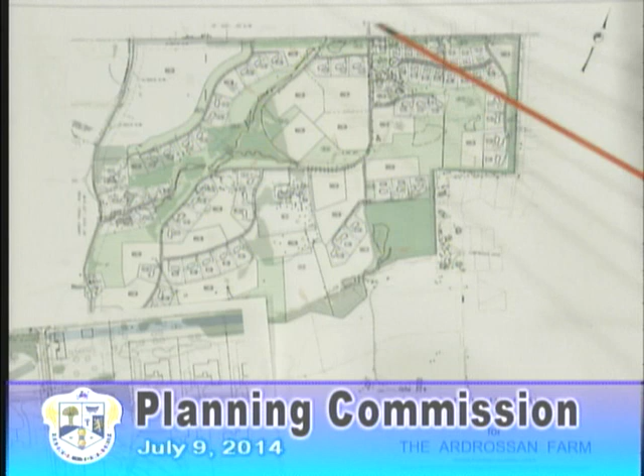And the stone wall there, you're not proposing widening that? Oh yes, there will have to be a widening of that stone wall at the opening, like there will be down here. And there'll have to be a reconstruction of a portion of the stone wall here because of sight distance, and a portion of the stone wall here. We're aware of that - restoration of those stone walls is part of the project.

Amy, can you, at least for my benefit, talk about the pros and cons of having 3 accesses, which are going to take what feels to me like maybe 90% of the traffic, versus 1? The pros and cons - of 3 versus 1. Are we better off with 1 or 3? Is it a big disadvantage to have 3 over 1, or is it an advantage?

The pros would be, as you're entering and exiting this site, the people that live in the development would have less delay because it's distributed at 3 different accesses depending on where they're coming in and going out. Actually, that's not true because these aren't connected. The cons would be to the motoring public on the roadway they're taking access to, because when you have multiple driveways, that introduces conflicts at each of those locations.

So are people going to need a left-hand turn lane, or slow down? You need to be aware that vehicles may be pulling in front of you or turning right or left, so there's more conflicts you need to be aware of versus on 1 road or 2. Or you could look at it as traffic calming. It goes both ways, and you could make an argument one way or the other on these things. That's why I deferred to PennDOT to see what they wanted to do on this. I understand the historical nature of the lot, and I understand the desire to keep that one-way entrance coming in.

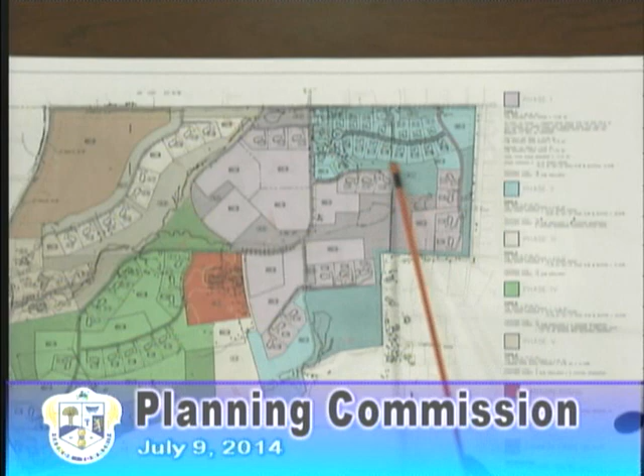All right, so which is road A? Road A is the cul-de-sac road in Phase 2. It is the road that parallels Newtown Road, the one we had a discussion on a few minutes ago. And that's the one that's 1,217 feet long.

So it's not the one that comes into the site, coming down on the page - it's the one that's parallel. That's what we're talking about? Is it the village road? It is the village road.

Okay, and that now has emergency access? Yes, we're proposing that at the tail end of that. Okay, and that will be a permanent walking path with emergency access built? It would be stabilized on either side to allow emergency vehicles. Correct.

Okay, and which is Road B? Road B is the road that comes in off of Newtown Road that Road A ties into. Let me just figure out which one is B. Okay, and that one is proposed at 940 feet, but there are only 4 houses on it. Correct.

Okay, what was your question, Susan? Well, it's just - I'm trying to get, on Road A, are there any waivers? I was hoping to approach it that way.

Are there waivers for Road A? Well, one of the waivers is the cul-de-sac length. In addition to that? If you look at this, you can see which ones need waivers. For instance, we are—that would need the, other than the length.

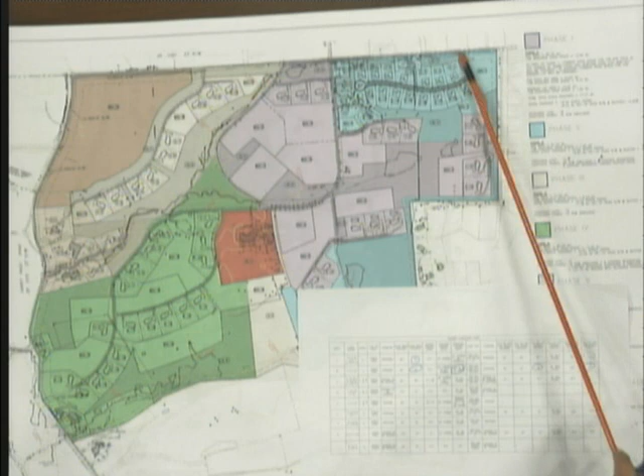Okay, and that's 4 instead of 2—what are the 2 additional ones? Again, we're proposing a 40-foot right-of-way instead of the required 60. We're providing 24-foot roadway width at the upper end and a 20-foot roadway width through the cul-de-sac instead of 28 and 24. The cul-de-sac radius by ordinance is 45 feet. We're providing a radius of the paved cul-de-sac of 40, and the cul-de-sac length is the 4th item.

Quickly, Susan, to address your question about the width of the roadways: in cul-de-sacs in the R1 and AC districts, it's 24 feet in width, not 28. Right, okay, thank you.

Is there emergency access for the tip of Road B? No, for those 4 units, if that road was blocked, what do those people do? They can certainly walk out because it's open behind them, but from the standpoint of driving through, there's no place to take an emergency access at that point.

You don't abut any roads. There is no development near that portion of the property. And what's the length of Road B to where it meets Road A? Because that's the portion that won't have any alternate access.

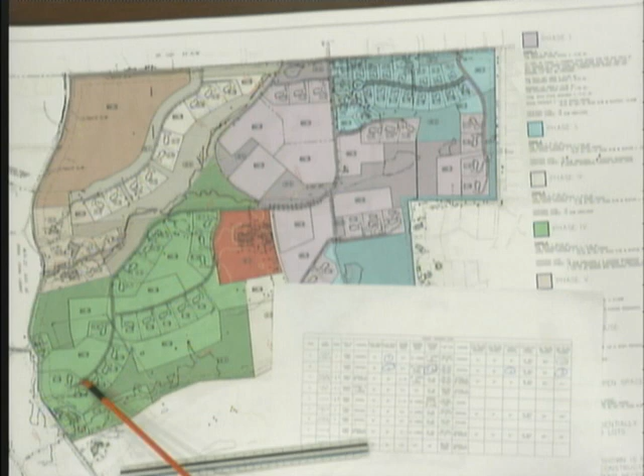Down to the end? Yes. And that's how we do it? We don't count the whole thing because there's only one access? No, it's just counted from that point, the very end point there.

Yeah, there's dual access in the other parts of the road, except for the little part right by the mansion. How is there dual access? That is because of the one-way road that goes to the mansion. Yes. Well, I guess you could use that in an emergency.

You could, however, how is the length of that road not appropriate to count from the point at which the one-way mansion road meets it? Because once that's blocked - and we have bunches of streets blocked tonight in Radnor, trees all over the place are down, there's a huge list on the website - from that point where the one-way road meets the two-way road, and all those houses, 1 through 13, there's like 20 houses down there. If a tree falls across that roadway, all those people back there, which is way more than 800 feet, are blocked in.

Let me follow up with her question first. How we interpret that is by the definition of cul-de-sac in the subdivision and land development ordinance. But I think we're not concerned right now about the definition, we're looking at the practical side. Why do we count it from there? Because as it's defined, it's from the intersection of two streets.

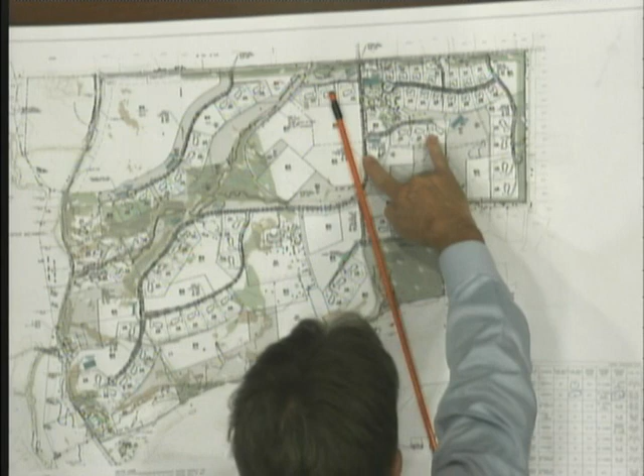Okay, where is Road D, please? Road D is this road. That's the one-way road. I'm sorry, that's Road E. Road D is this small private roadway at this point here, right down in phase. And that will remain private? Yes. That has one existing home and 3 more to be built, or 4 more total. There will be 4 - 3 new, 1 existing.

Okay, and then the one-way road is E? Yes. And that's existing? That is existing. All right.

F we talked about, where's G? G's got to be this. Why are you making the Mansion Road, that you think is hardly ever going to be used, a public road? We're making all the roads within the community public.

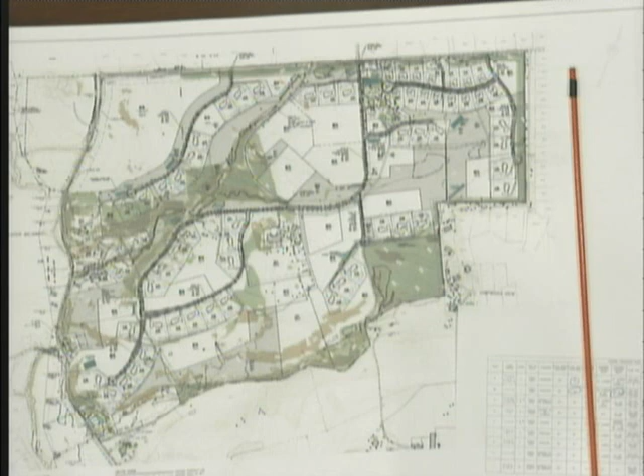Not all of them - well, we have D and I which are basically more or less common driveways than anything else. They're small roads. But they are public roads, and public roads have to be plowed, correct? That is correct. So you're proposing that the Mansion Road be a one-way, hardly ever used road, public, that we now have to plow?

And for which you get liquid fuels and have no houses on it, as I understand it. You're saying that it's hardly ever used - why not just make it a private road?

They were saying tonight they envision it hardly being used, and that's the reason they want to keep it one way. You envision the road coming off of Abraham's being the main access for the 20-something homes down here, and I expect this road to be used additionally for access to the mansion. I appreciate that, it seems like an odd road to make public. It doesn't seem odd to me for the amount of use they were saying. Well, if they have an event or something, it's fine. Yeah, it doesn't bother me either. All right.

So where is Road G? That's the other half of - Road G is this section in Phase 4. Okay. And H we talked about.

And I, where's I? I is Phase 5. And that comes off of Darby Paoli? That is pretty much the existing driveway coming into the site. We're making that a private road. Road I is the one that comes into the barn, down by the big barn in Phase 5. Okay.

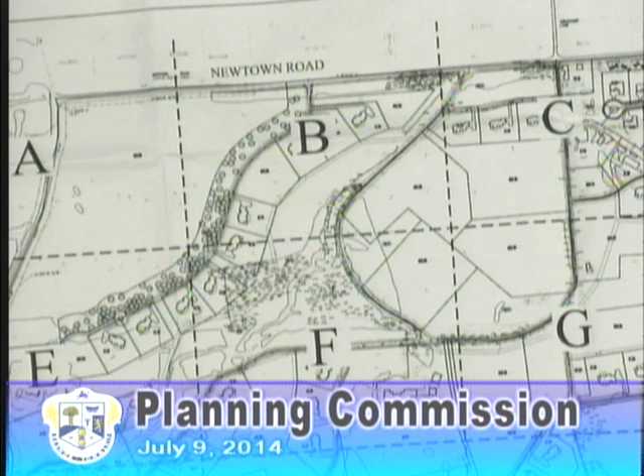Anyways, we were educated through the conditional use that the buffer would be 100 feet, and that it would provide enough screening and variety that from the pedestrian view shed, which is the roads that intersect at Darby Paoli and Newtown, per the hearing officer, would be taken into account. Not only the siting of the houses within the lots, that's one. Number two, the landscape of the buffer would be substantial enough to shield us to the maximum degree from the residents' perspective on the roads. That is how I understand the writing to be.

This is 108. All I'm here tonight is to show you a few things that are standard buffers, and what it would equate to if this were designed as a standard buffer in Pennsylvania townships all across the state, from Parkesburg to Abington Township. They have pictures in most of them. Radnor doesn't have pictures of standard buffers, and that's why it's been hard for me to understand what the number of plantings would be if this were normalized.

So, if you'll allow me. Okay, if we can zoom in on this. I got this picture off Google because I love Google. But this is just a standard buffer, and this is what we see in other townships across all of America.

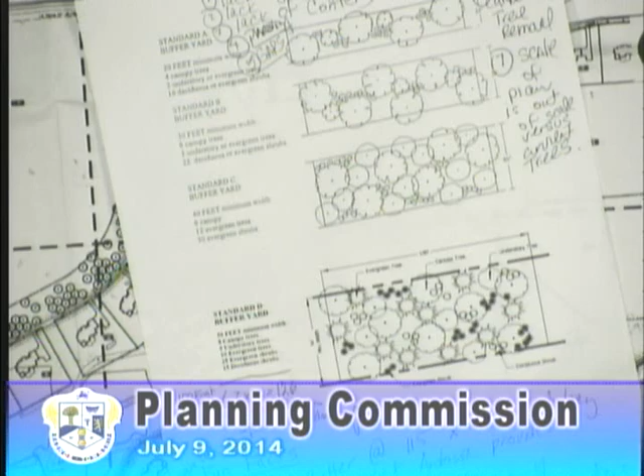If this is 2,000 feet, and I have no idea if it is, but it's something—I used his words, which was a few thousand feet. I don't know what it is, but it's 100 feet deep and a few thousand. This would equate to this.

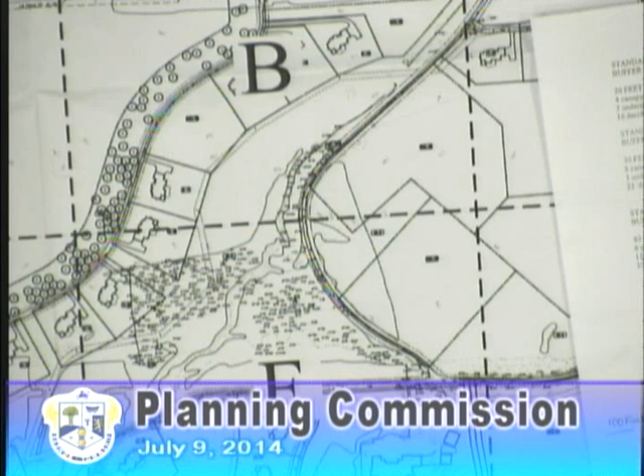Excuse me, I'm sorry, I have to interrupt you for just one second. I'd like to ask the applicant: when you show the buffer on this scale of a plan, is this meant to show where the buffer is, or is this meant to be the final detailed plan of the buffer?

I believe—and you can go look at the map on the smaller scale, which is this scale—I believe that is an intended planting plan. That's your planting plan. Thank you. And that's what was reviewed by the Shade Tree Commission and the arborists.

Is that what you used, Leslie, for your comparison? Yes, I used these two items at Ardrossan and then found standard ones. I also went to the last Shade Tree Commission meeting, which was last week I believe, and it is my impression—Doug, you were there as well—well, there was somebody there from, I forget which board, but anyways, they said that they did not approve their plan.

They were shown their plan before they went to preliminary, which is what we're going through now. And they didn't know about the judge's decision. None of them had that. I gave them all copies, by the way. And I said that some of us, when we saw this very sparse, 100% deciduous, 'I'll be dead, my kid might be dead' kind of buffer, they seemed to want to hear what I had to say. That's all I can say. And I am hoping that after spending the taxpayers' money, that you are stewards. I am counting on that.

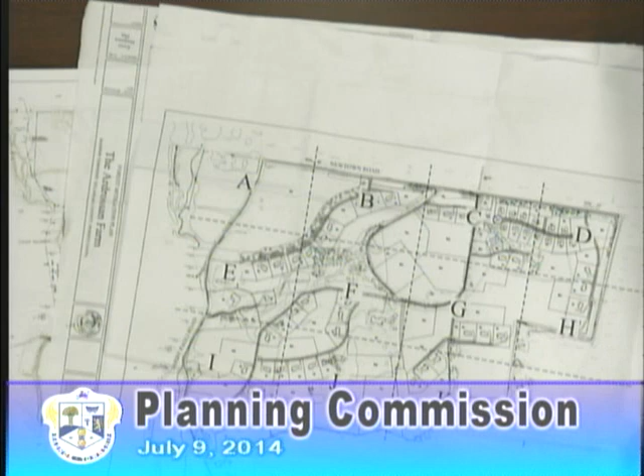I have a specific point to make about this cul-de-sac here, which parallels our driveway. And there was a question about the safety of that without an egress. And I would point out that the alleged buffer in here consists mostly of, I would say, at least half dead or dying trees of some size. And they fall over with some regularity. We had one across our driveway last night, which was completely dead, just from that area, and have had them fairly regularly in the past.

So unless they did something with that buffer, which I understand nothing is being done with, that road is fairly in harm's way. There's also a stream across here, which is not shown on the plan. It's about here, that runs all the way across. Let me get the landscape plan so that you can use it. It looks the same, but there's a stream just about here that runs across our drive and on into the properties on Atterbury Road. And it concerns me a little bit to hear about another road being built up here with no water management of any sort other than a passive system.

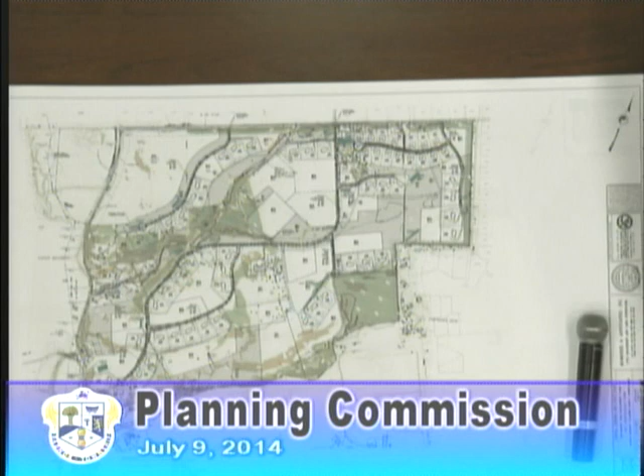If you go out to Newtown Road and go from this point down towards Conestoga Road, I've been there 40-some years, and two drainage systems have been put in by the state on the right-hand side. They've dug up in a very small right-of-way they have and put in gravel beds down to the stream. And that road is an exercise in driving while aquaplaning in a heavy rain, perpetually. I mean, it's not a joke. You go out there in a heavy rain, there's an inch of water on the road. I mean, it's really disastrous. And I think that's what may happen with no real water management system on these smaller roads.

I had some other remarks, but I think that's all I'll say. But it would be worth looking at this buffer here in relation to what really is happening, and it would be, I think, worth considering the two-way road to alleviate some of the traffic burden on the neighboring residents.

Martin, can you sign that yellow piece of paper there? I don't see one. Oh, I'm sorry. Thank you. Leslie, did you steal our sign-in sheet?

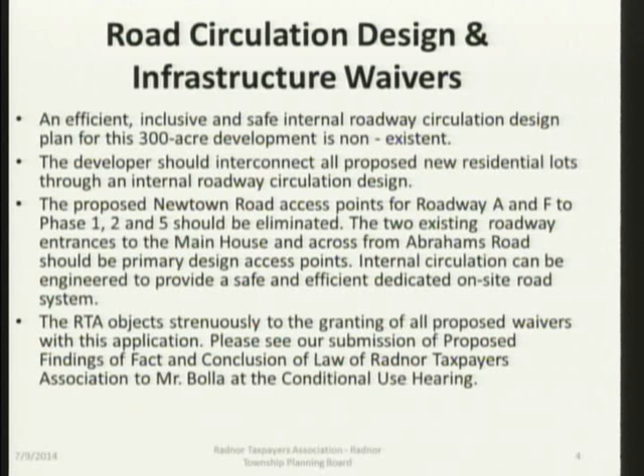Okay, I wanted to talk to you about the view sheds, if we could, and the proximity of the village. Can we take the overhead camera off the PowerPoint and put it back onto the overhead? Thank you.

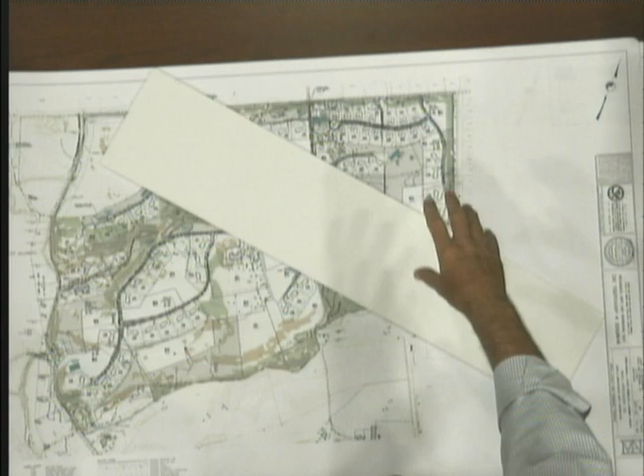As we can see, if we do this village area, the existing buildings and these 3 proposed areas here, Phase 1 and Phase 2, approximately 50% of all the new and existing buildings permitted by the conditional use fit within less than 25% of the entire site. And they also sit next to all of the other residents adjacent to this property.

I have, if we could somehow zoom in on this and possibly pan it once for this photograph that I've just put up here. Is there any way of doing that? This is a view from my second floor, and I live right here, along Newtown Road, so you can see our fence, the wall, and then the fields that are out here right now in the wintertime.

And as it was stated, this whole area up here is the highest point of our drainage. If you're going to build 1, 2, 3, 4 homes, and then put behind it 5, 6, 7, 8, 9, 10 homes that are all almost 40 feet on the highest point of the road, where the grade is actually above the wall, we might as well just have a condominium going up right across the street from us. We lose that view shed, we lose the field, we lose the trees behind the field, we even lose the valley behind that we can see from our windows as we are here today.

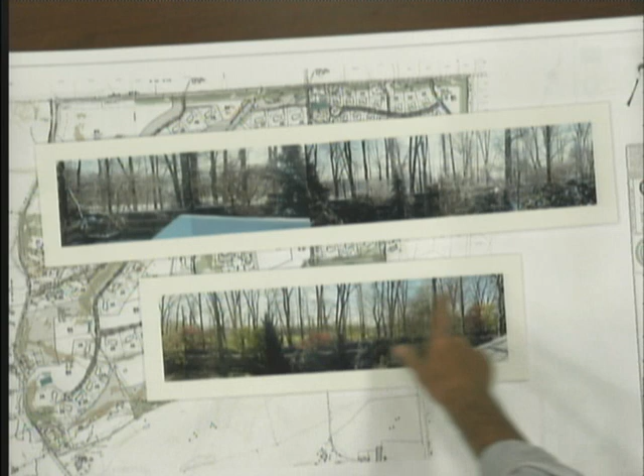Another view of that would be with a little more foliage. And as you can see, most of the foliage is on our property with these high trees and canopy, and you can see the grass growing in the field behind.

And just to get back to the landscape of trying to buffer this area, putting a 5 or 6 foot tree in front of a 4 foot wall, in an area that has an elevation about 5 or 6 feet higher than that behind it, is not going to do anybody any buffering when you start to put up these houses behind us.

So that is a little bit of visual information for the board to take a look at what we're going to experience as neighbors that live along Newtown Road once these houses, if proposed this way, get approved.

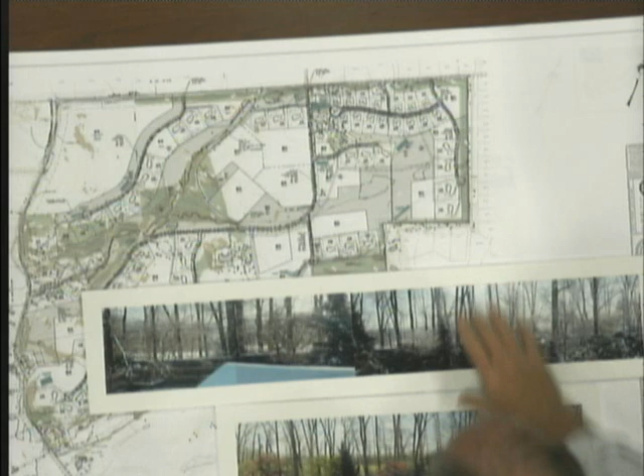I myself understand it's flat, it's level, it's the most economic way to put the smallest lots, largest homes, to make a dollar and do a good real estate, a profitable real estate project.

But as it was said, if this village, and I don't know where the township needs another village, to be honest with you, I don't know if that's in any of their master planning as you guys put that forward. If this was all moved from this area down into these areas, which are the investment lots, we would not see them.

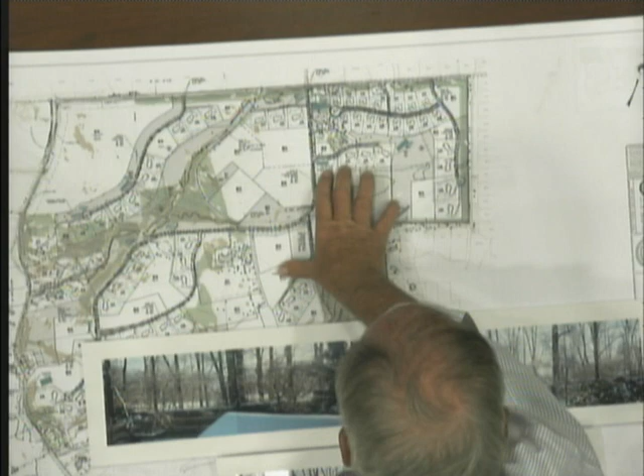And perhaps that would have been a better solution to be inclusive with the neighborhood and all of our taxpayers in the area. So I'll leave that as an issue with regard to the first issue, the village concept in the Northeast Corridor.

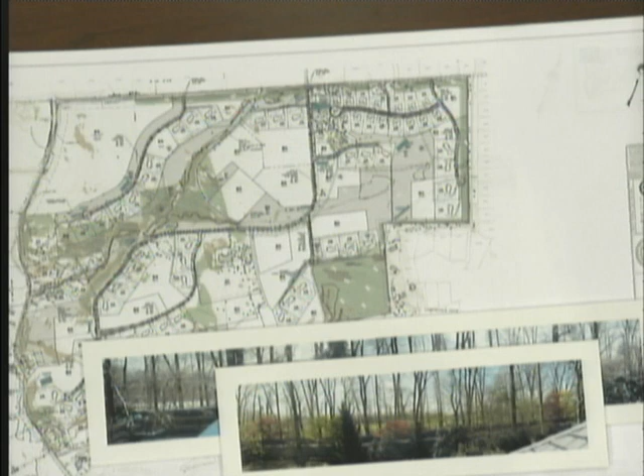Second issue I had is traffic. I guess I can echo the other comments that were made with regard to the traffic that we have along Newtown Road and Newtown, Darby Paoli, Conestoga, Radnor, Chester Road, Abrams Road, which is so narrow, Church Road, which is so narrow.

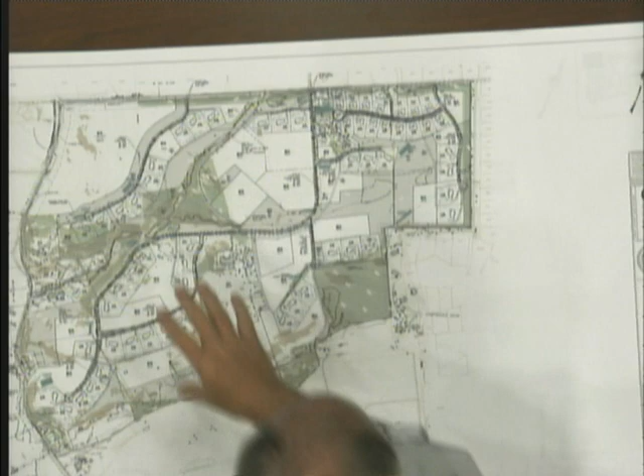There's got to be a solution here, because this property, while it's only proposing 70-some units today, has the possibility of putting other units and coming back for conditional use and adding other houses, which will affect not only the roadways out here, but possibly any of the roadways that you're now talking about, the waivers and what have you, that are internal to this property.

And with that, I'll move to the last piece I want to really talk about, and that would be the infrastructure and the road circulation.

I sat down today and said, where is A, B, C, D road, E road, F, G, H? I mean, they're all there, but they don't work. From a design standpoint of interconnecting things for life, safety, health, welfare, I just think the design comes up very poor.

The Radnor Taxpayers Association does not want this road, nor does it want this road access on Newtown Road. They feel it just adds to a safety issue. There's got to be a way to bring the two existing roads together and utilize them, and pick up any of the circular infrastructure inside. It takes time, it takes engineering, it takes money.

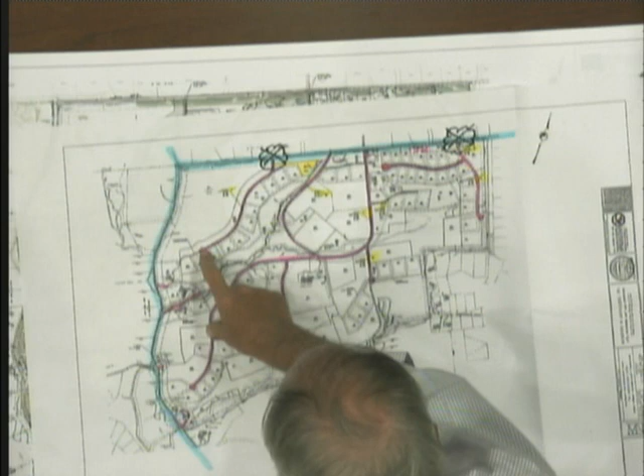So if they can find a way to get access to here, they should be able to find a way to get access from here to here. Gradient is not an issue, okay? There's got to be a way to get a road from here to here. It's engineering, okay? Bulldozers, cost, engineering could make that happen. These roads can interrelate if the time is taken in order to do that.

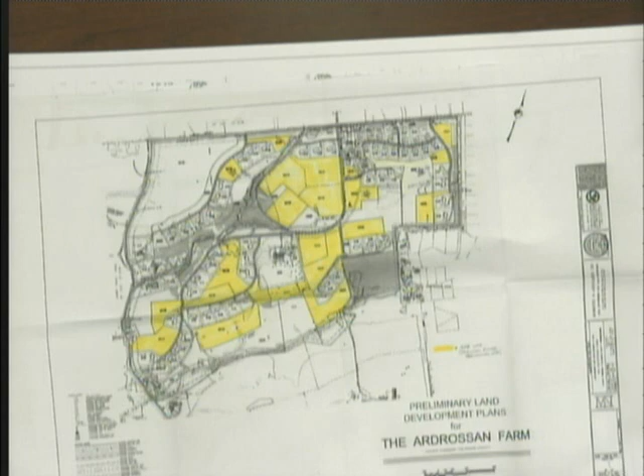What we have is a design plan, and everything in yellow there are these investment lots. They're driving the whole design process, not letting you build what's needed to have infrastructure, circulation, and roadways. I don't know who's made it sacrosanct that you can't design a residential development that actually can circulate people from one phase to another, to another, to another, without using, in blue, state highways as your main circulation artery.

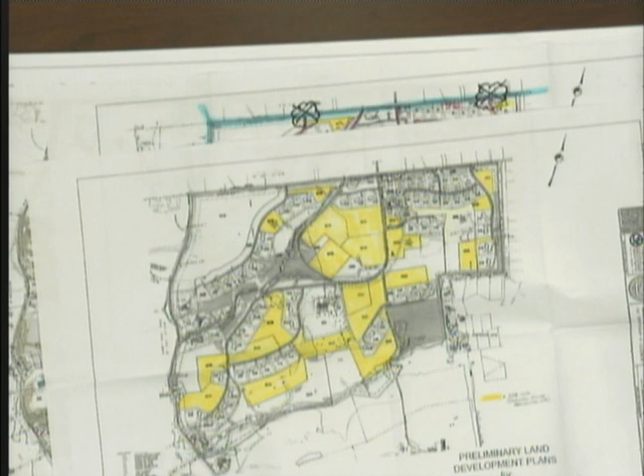So we, as the RTA, do not support these two access points. We do not support the waivers that are being asked for. We would like you to go back and look at the findings from at least our facts of findings and conclusion of law presented to Mr. Bola in the conditional use that we put forward. We objected to it then, we objected to it now. Obviously, it was supposed to be deferred until it comes here for zoning and for planning.

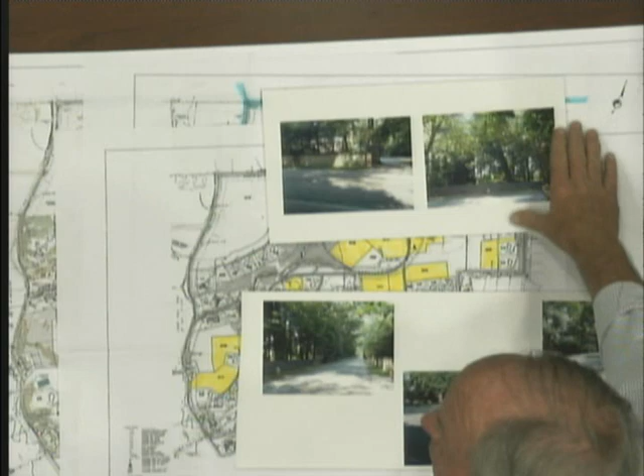So with that, I would like to say two other things. These two I hold to be pretty personal here. If we could zoom in at all — on the water tower. Okay, this is a water tower here.

This is where the proposed road is supposed to be cut in for Road A, to the right of that fire hydrant. So all the trees to the right of that would all come down to permit that roadway as proposed. That roadway would then face the Dubers' property on Newtown Road, so that you would have 19 homes with their traffic coming out right at these people who have lived in this house for over 47 years, okay? And the traffic, the lights, the noise, the other traffic stopping and going and coming would be situated right in front of their home.

I think it's objectionable, and the Dubers asked me to speak to you and let you know that they are totally dissatisfied with this plan as presented, as though they picked them out specifically to make them a T-bone intersection for the future development of Ardrossan.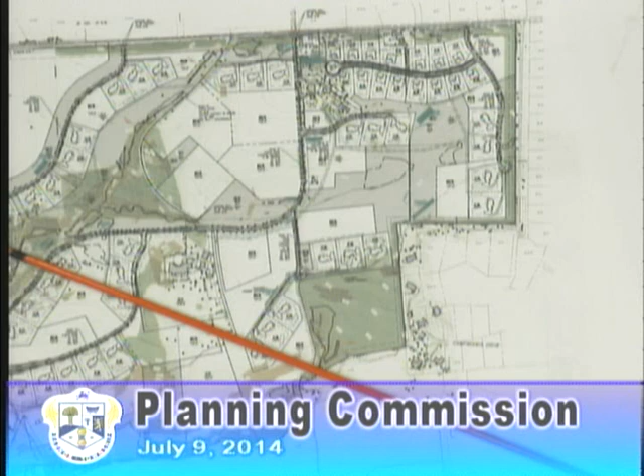Actually, I have a question, if nobody's speaking up. Have you really considered, or can you consider, the possibility of shifting the village more away from the edge of the property? Or is this written in stone? This is really what we are applying for. Is there no possible way of flipping a few things around to relocate it? No, not with the time requirements. All right, thank you.

I did have another stormwater question, Steve and Roger and/or John. The 10 or 11 existing homes on the property, since this is all a new development, will they have to install stormwater management? Yes. The existing homes will as well? Yes, and that's been provided for on the preliminary plan.

Doug, did you have a question? I was going to make a comment that I did miss the last Shade Tree Commission meeting, but I was at the one that we talked about this in May. One of the things I remember talking about extensively was the sizes, the diameters of the trees that they're planting along the buffer at the end of the rye field. I did mention at the time that I thought they were a little small, but they're all tree people and I'm an engineer, so.

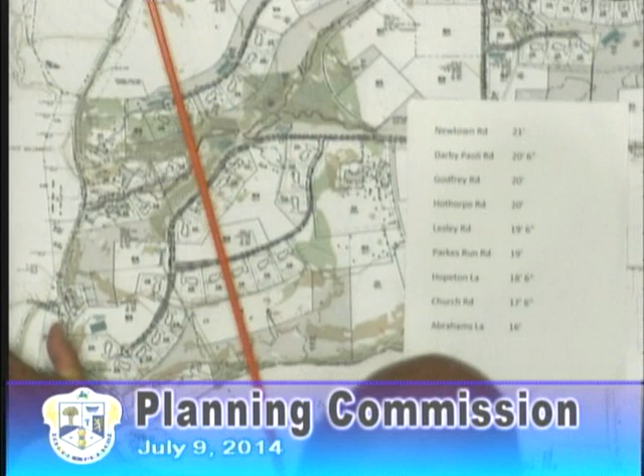Yes. Okay, that's the one where, if you're saying the school district is possibly going to be coming in there, that cul-de-sac is small. I think the school district should be consulted about the width of that cul-de-sac. Yeah, I didn't suggest that the school bus would go any further than that. Okay, got it. And then turn back. Yeah.

Thank you. And you have 6 houses there, probably not a lot of school kids. At the end of the day, isn't it the school district that makes a decision as to where the buses go, and what they will serve and won't serve based on the conditions?

Well, I don't want to get too in the weeds on that. But that's why I asked the question if the applicant had been reached out to. This is a significant development for the township, and it has the potential to be more significant if the investment lots are potentially developed. So that's why I asked the question last month.

Because it's a public road. I understand, but I just think we're getting focused on what could happen in the future. I mean, it could be Manhattan down here in the future. I just don't think we should - the application that's in front of us now is the one we should be focusing on, not what could or could not happen in the future, because we know it can happen in the future, but there's nothing we can do about it. That's not the application in front of us. I would just like to stay focused on what's on our table.

This application is asking for a tremendous number of waivers. It's fine, let's just stick with the application and the waivers they're asking for. Well, I think the notion of planning is thinking about what are they asking for now, what's being proposed now, what could happen down the road, and should that impact some of our decisions with regard to the waivers.

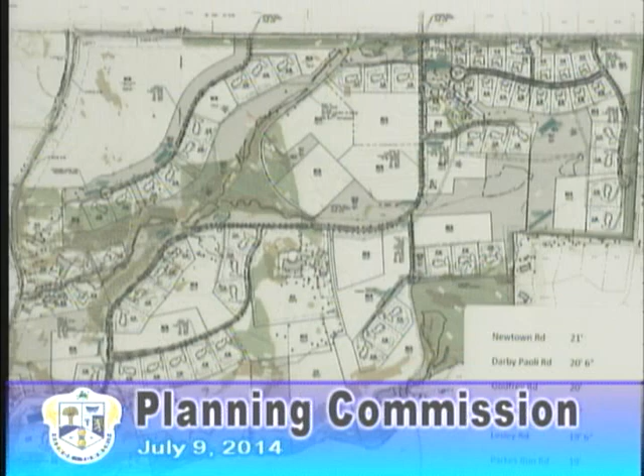Yeah, can you see where Hothorpe comes in? It feels like that village could have even been redesigned to have created a four-way intersection there instead.

I don't know if that's preferable from a traffic standpoint, but it's probably too close to the other designed entrance. Certainly it could be reworked. I'm guessing, I don't know. Anyway, I feel for those neighbors as well. It feels very specific, and I think it's really an investment lot.

Okay, well, let's focus on how we put that in a comment. Assuming we have a general agreement on that, how do we put that in a comment to the commissioners? I'd like to- we'd want to see something like, we'd like to see.

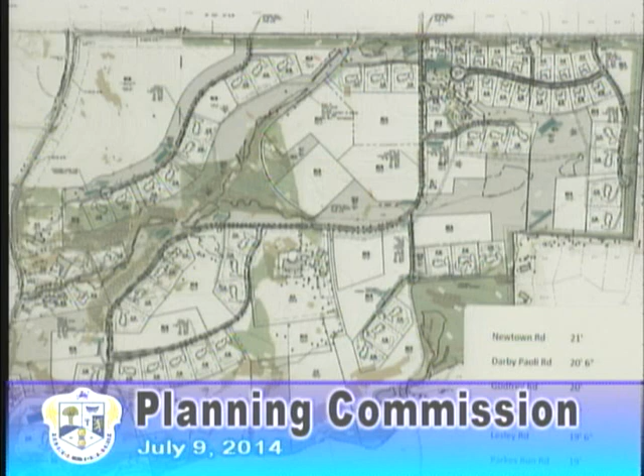Susan, could I just add something to that? When you have offset intersections like that, if you know you're never going to go to a traffic signal, you're actually better off having them not aligned so you can eliminate some of the conflicts that can potentially occur at a four-way intersection. By offsetting them, you only have 7 houses on one side, and I think it's actually easier for those homeowners to come out when separated, and the spacing between those 2 intersections would be enough. That would be preferable in my opinion.

Do you know any strategies to limit the impact on the neighbor who's across from the new road coming out? It looked to me, and I'm not 100% sure because I'm not very good at shielding and screening, but it looked like the wall was right where that entrance would be coming in. So that would help, at least. If it's right at the driveway, I would anticipate the lights may come in and be a problem. I don't know where the house sits on the site, I don't know all the particulars, but it looked to me like that access was aligning with the wall, so you wouldn't get that headlight problem going on.

I want to just say, because you addressed the question I asked so specifically, I appreciate it. So what you're saying is that, to some extent, it comes down to whether or not we believe Newtown Road will ever become a signalized road. And if it does not become a signalized road, then the offset streets is preferable. If we thought it were to become a signalized road, then that intersection would be preferable.